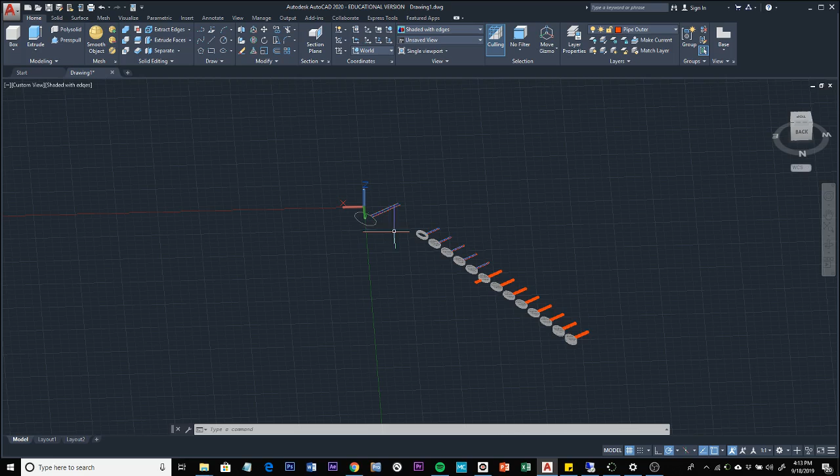This assignment is meant to be a review of what we've already covered up to this point with the e-bike. This is the little hammer I created today, not that great, but don't make fun of it. I'm going to go step by step through this with smaller examples here. You will only have one hammer as a result, you don't have to do all these different copies, this is just for example.

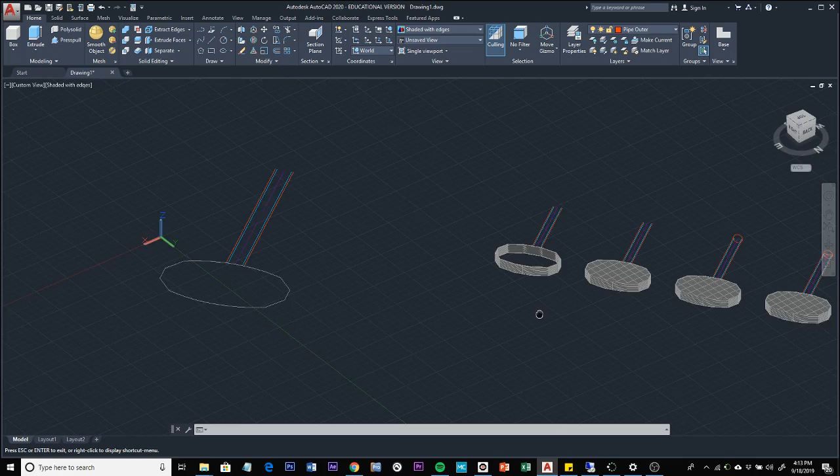Step number 1 is going to be extrude this polyline to be a surface. If you do not specify surface extrusion, it will want to extrude as a solid, but we're going to be modeling in surfaces today, so you want to use the surface tab extrude.

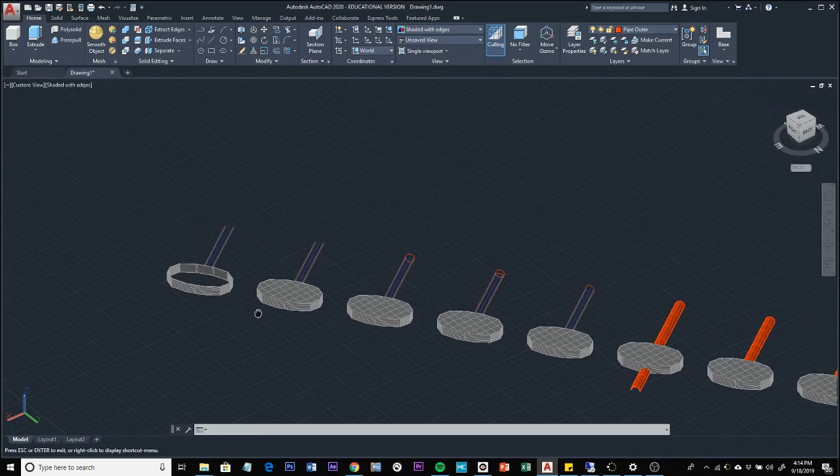Once you've done that, next you're going to create a patch, this thing right here, and to make your life a little bit easier, don't forget to choose chain from the menu down here once you find the patch tool.

After that you're going to need to align your UCS, which is a challenge, so just concentrate, it'll be okay. First thing you want to do is find the UCS tool. I'm not even going to give you that hint, you should know where it is.

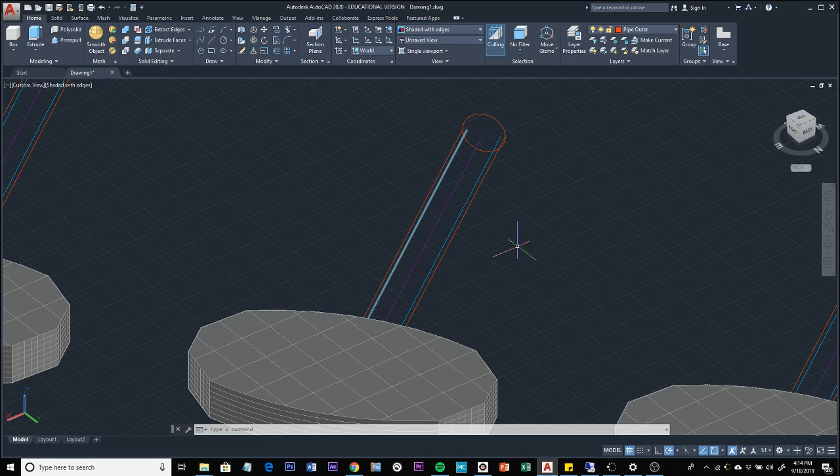Then you're going to align your UCS to one of these lines, otherwise known as hint objects. Then you'll have to rotate either on the X or the Y axis. I'm not going to tell you which one, you have to figure that out.

Then you want to draw a circle, and if your UCS is aligned correctly, your circle should look like this when you orbit.

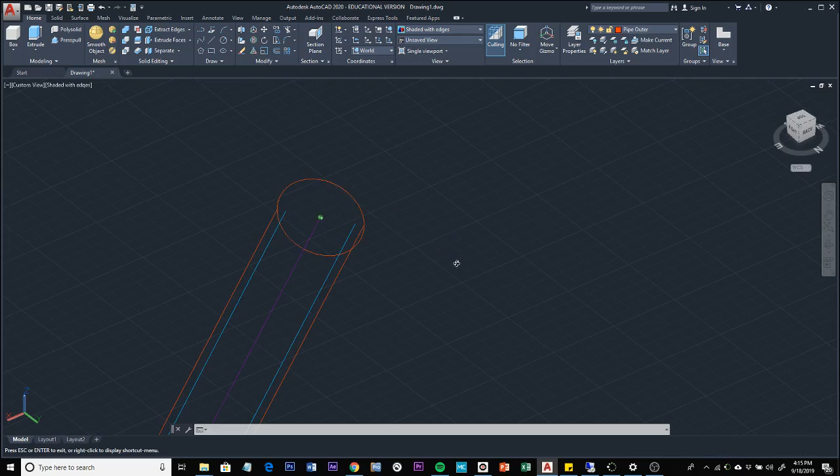So it's ready to be modeled for the handle. If your circle looks any different than that, you did not do it correctly.

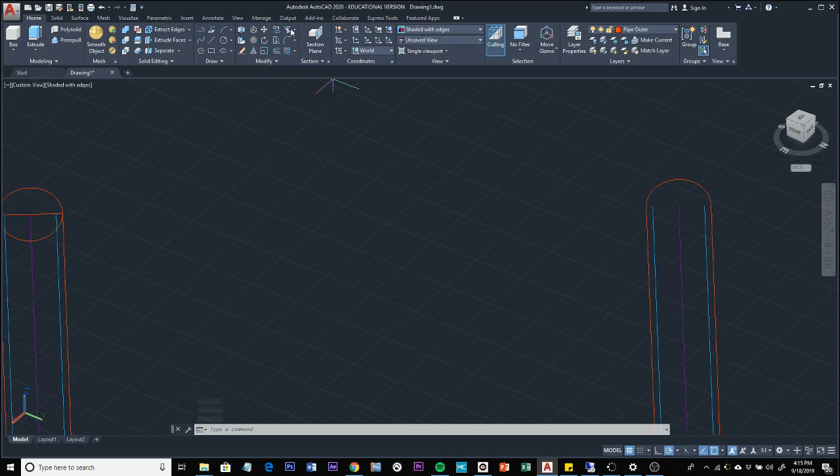Try again. Next step is going to be to create a line here in order to trim the circle. You'll want to use that line to trim the bottom half off, trim somewhere over here, maybe over here specifically.

Once you have a half circle, the next step is going to be to extrude that half circle. We're going to extrude it through the head of the hammer, so all the way through.

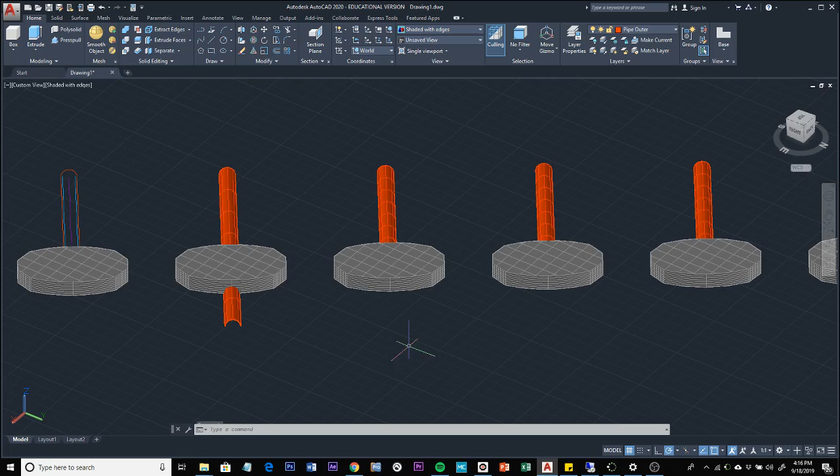Once you have that, you're going to be trimming. It's a different kind of trim, not the trim you find on the Home tab, that's for lines. You're going to be trimming a surface, so you want to use surface trim. You're going to trim off the outer part and also the inner part, the part that's extruded inside the head of the hammer. So this is the trimmed portion.

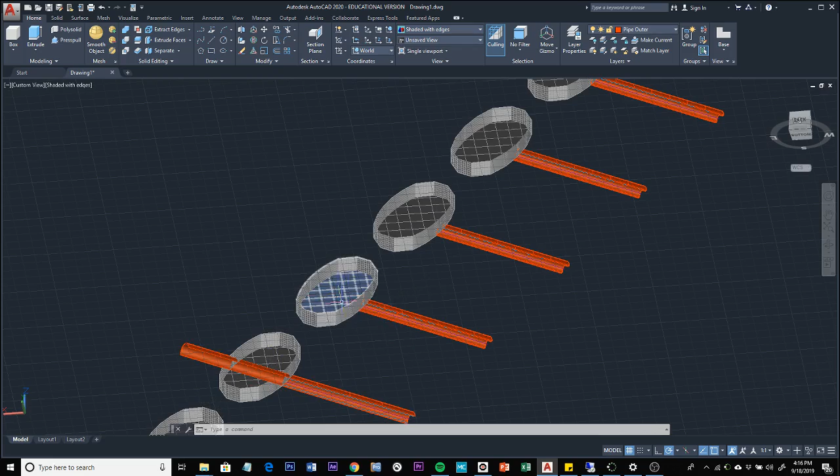Once you have it trimmed, we're going to focus on the handle. So you got this here, you got it trimmed. Now you're going to offset your surface. You want to offset inward, and there's a nice guideline here for the offset distance, so you're going to use that as a reference point.

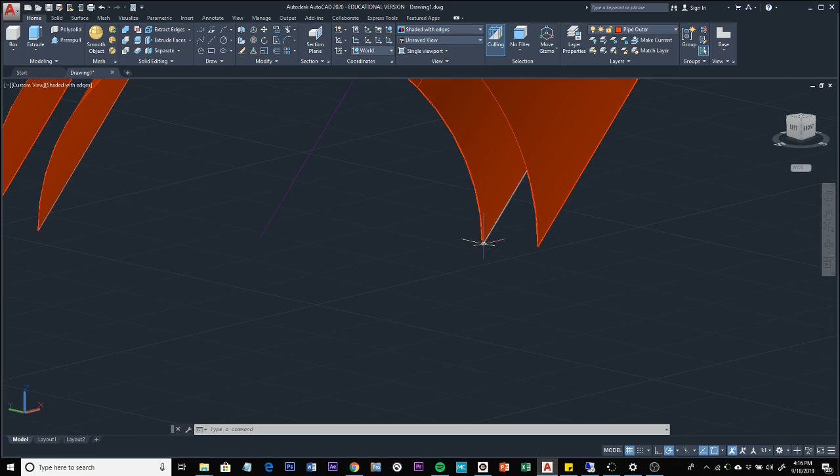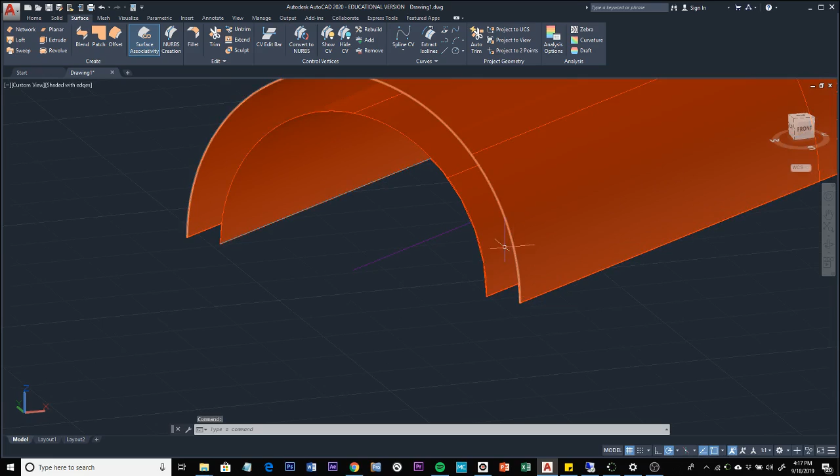Once you have your surfaces offset, you're going to be using, on the surface tab, the extract isolines command, and you want to extract the isoline right at the edge, the outer edge of these surfaces. So you'll have 2 arcs when you're done. You should be able to hover over the edge and see that you have an arc there and an arc there.

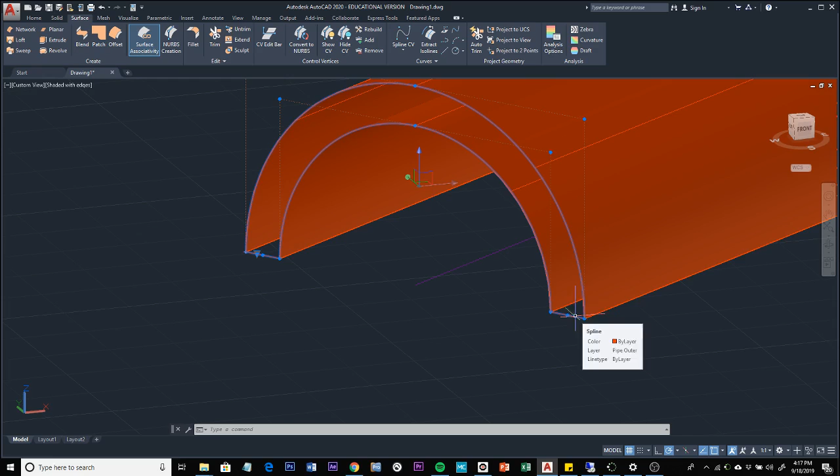The next step is to connect those 2 arcs with 2 little lines here. See that in the next step. Once you have those 2 lines, you're going to combine both the arcs and those 2 little lines together to form one polyline, or in this case called a spline, because we're using arcs. Sometimes that's called a spline instead of a polyline.

Once you have that, it's a closed shape, so we can create a region. So this here is a region.

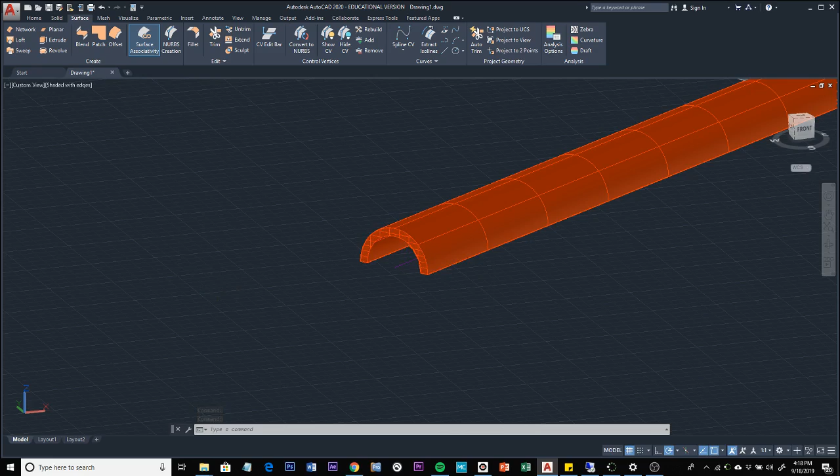After you have your region, you want to convert the region to a surface. Convert to surface, CONV to surface. If you're dead set on using buttons, go to the Home tab, Solid Editing. It's one of these two, I'll let you figure out which one.

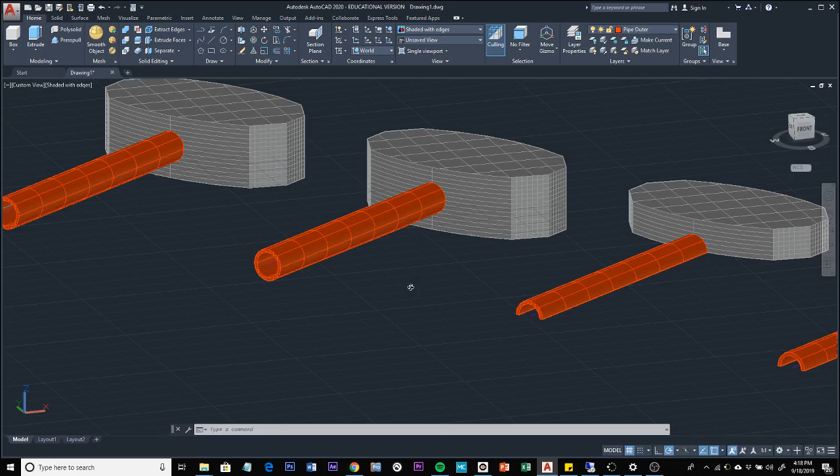Once you have all of your surfaces created, we're going to mirror them, so one half becomes a whole here. When you have your UCS aligned correctly, it's going to be best if you view it directly from the top or bottom of the hammer, and you're going to be using the mirror line that goes right across here. So you're going to be mirroring all of the surfaces. You should end up with something like this.

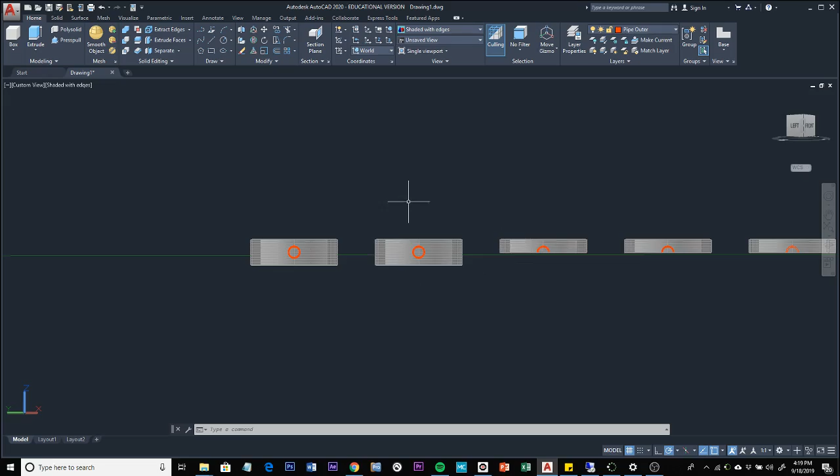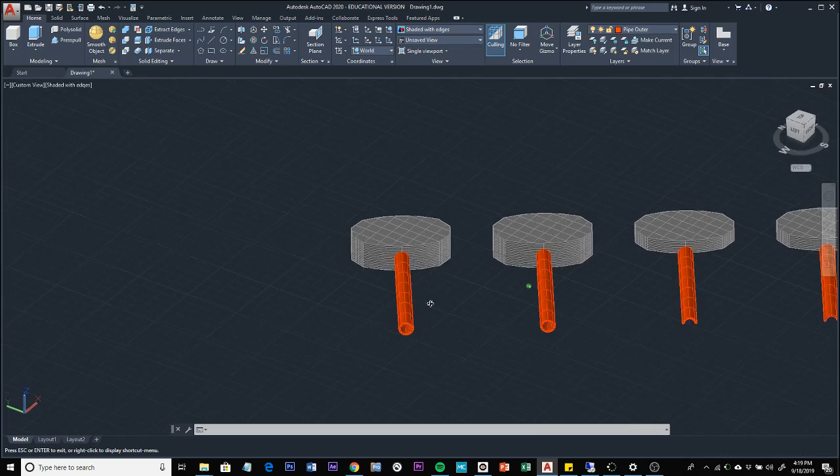Now the final step is a little bit of extra credit if it can work for you. I was not able to get mine to surf sculpt into a solid, which is the drawback in trying to create a solid using surfaces. Sometimes if there's just a little tiny gap in your surfaces, or your UCS was just off by a hair, just a percentage, then it just won't work. I'm not sure why it didn't work, but if you can get yours to surf sculpt into a solid, I'll give you a bonus point. How about that?